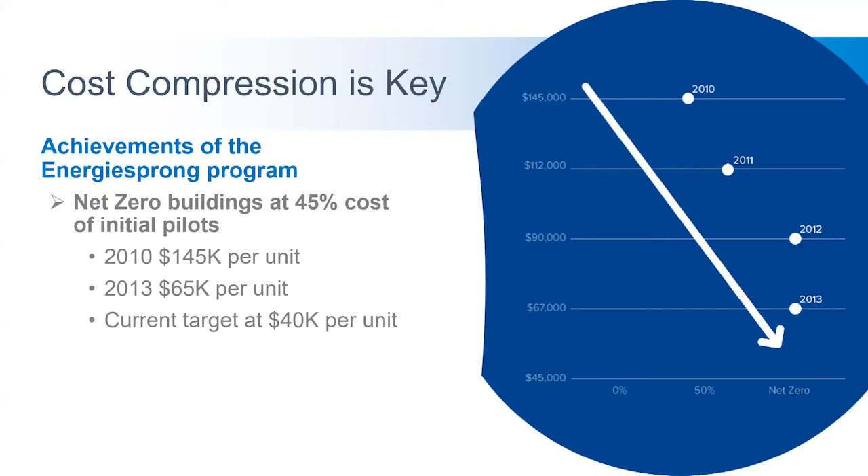So we know cost compression is key, and this is what's really attracting us to this industrialized approach, and really taking a lesson from what happened in the Netherlands during the Energiesprong program. In a handful of years, they were able to significantly decrease costs, moving from similar price points to what we're looking at right now today at about 150,000 per dwelling unit, to substantially lower costs, so something on the order of a 50% or greater reduction in costs using this industrialized approach.

So what have we done to date with the Retrofit New York program? I'm going to go into a little bit of detail about that. So in 2018, Retrofit New York really launched its first public-facing initiative through a design RFP that was launched in February of 2018. During the course of that process, 6 design-build teams were qualified and selected, and we ensued on a 6-month design process for those initial pilot projects. So by the end of 2018, we did have 6 designs that those teams produced.

In the middle of 2019, our first pilot actually entered construction, and earlier this year, we're kicking off a pilot effort with NYCHA, the New York City Housing Authority, to look at deep energy retrofits within their portfolio. I'll go into a little bit more detail on NYCHA and that pilot opportunity a little later. And we're also doing some work with demand aggregation with the buildings in our neck of the woods.

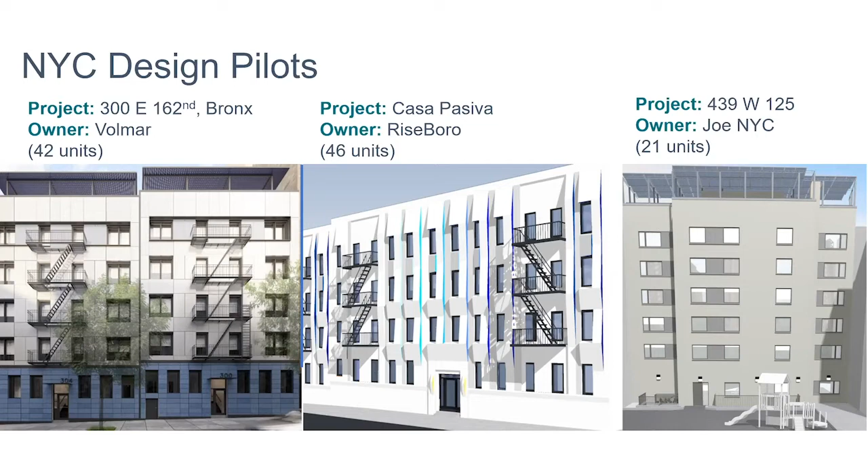So the pilots that we released in the first round are design pilots, so we don't anticipate that all of the pilots will actually make it to construction, but we are anticipating about half of those pilots to actually make it to construction. Right now we have the Riseboro Casa Pasiva project, which is in the middle of the slide. That project is currently in construction, and we're anticipating the Joe NYC project, which is on the right side of the slide, to close and enter construction around Q3 of this year.

Unfortunately, due to the COVID-19 impacts and the shutdowns, there's a lot of uncertainty around timing and the ability of various stakeholders to move forward, but we are hopeful. Similarly, we've done 3 design pilots outside of New York City to target low-rise typologies.

start to innovate. Some of the big challenges, to no one's surprise, cost is a huge driving factor here. Some of the technology just isn't quite ready for prime time. Specifically, we have some challenges around electrification of domestic hot water for larger buildings. The supply chain isn't really where it needs to be to really take on this Energiesprong style approach. And market segmentation is a challenge.

So data about the market, data about the buildings, that's very much an issue that we're still confronting and we're attempting to really remedy. So we've had some time to digest all of the learnings, and what we've done is really pivoted our approach away from this design-centric approach to more of a product development and implementation approach. So to put it bluntly, if you want to really pursue an Energiesprong style retrofit, you need Energiesprong style products in the market, and we just don't have that.

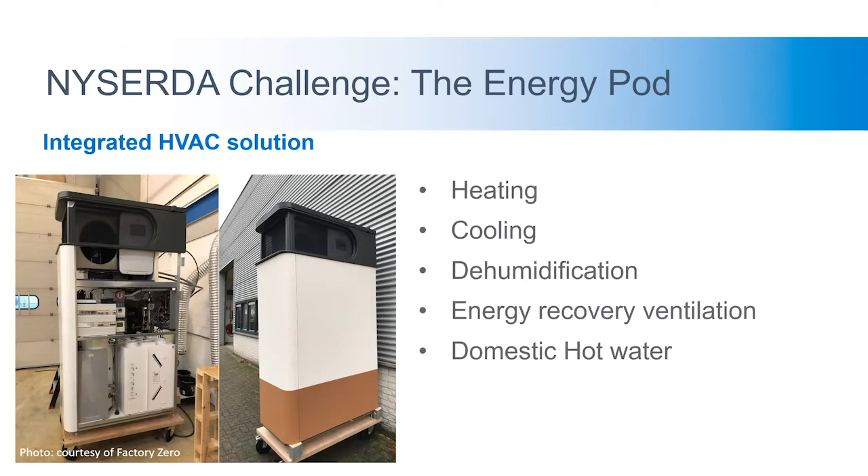The image that you see in the slide right now is an example of an energy pod that's available in the Netherlands through Factory Zero, and we're looking to bring something similar to our market. We did get quite a bit of interest in that round, and we got a handful of viable proposals actually put in, but unfortunately, again, due to the shutdown, that's causing all kinds of impacts on the ability of manufacturers to actually come through and develop what they actually proposed.

So there are some impacts that we're trying to mitigate, but ultimately we do expect to see some product come out of this effort in the next, I would say, 12 to 24 month time frame. So what are we looking to do in the near term going forward? So similarly, we're looking to put out some support for building envelope. So really get firms to come in to develop solutions specifically for the retrofit space for more comprehensive building products. So things like panelized building envelopes, specifically for retrofit application.

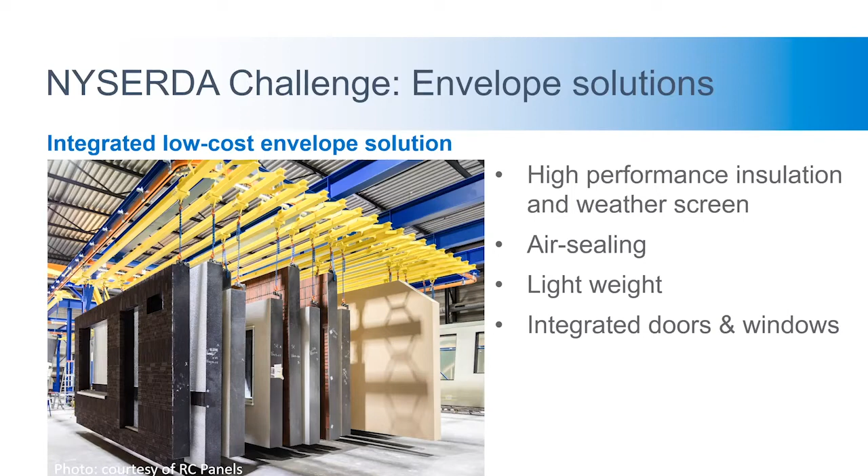Similarly, we want to put out some support to what we're calling solution providers. So what's a solution provider? That is an entity that will deliver the end-to-end solution to the building owner using more of a turnkey approach. So there's not anything quite like that in our market, and there's a fair bit of work to do there. But in essence, we're really looking to drive a new way of doing business through this solution provider model. And in essence, what we're looking to do is bring more innovative business models to the space, really pulling on all the levers, supply, demand, finance, regulation, to really look at how we can really drive this

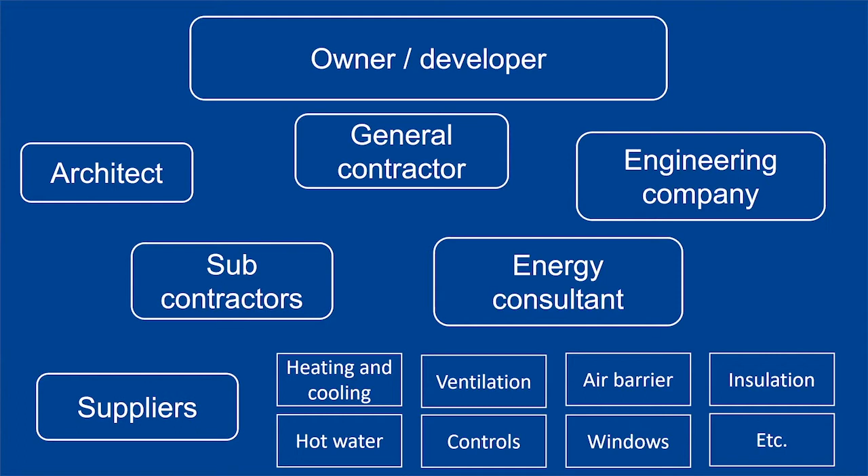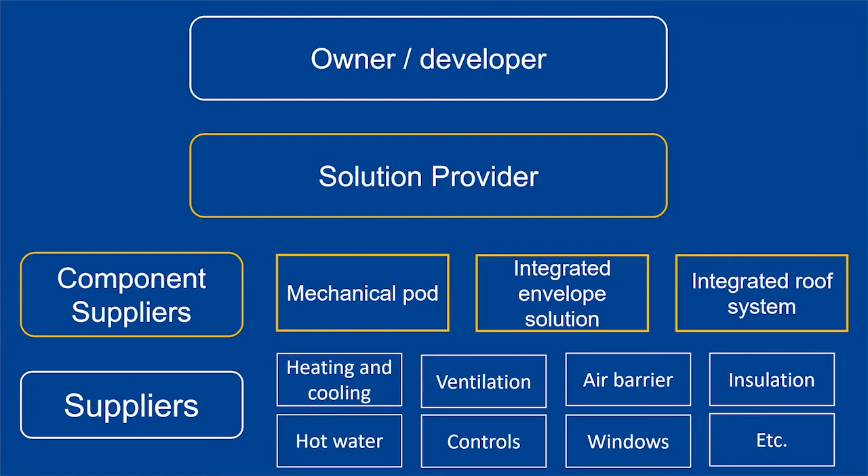approach in our market. So when you look at an existing construction project right now, you have an owner that needs work done on the building, and you have a bunch of actors trying to deliver that service in a less than optimal way. What we're proposing is to really flatten the market a little bit and provide all those services through that solution provider through use of more integrated components. So that needs a fair bit of work, and we're in process of making the business case to do just that. And what does that mean, making the business case? Well, there's quite a bit of work ahead of us. Part of what we have to do is really reduce barriers to entry in the market.

And when we talk about making the business case, there are pretty big ticket items that we need to address. So items such as quantifying the market opportunity, really providing risk mitigation mechanisms, and really making sure that capital is used more efficiently in that process. And again, really sizing the capital need to support our stakeholders on that initial ramp-up period. And of course, using those development of innovative business models to really drive cost compression.

Part of bringing more innovative business models to the market is really pulling the sector into the new millennia. And we think a big part of that is utilizing technology to implement digital processes. And when we say digital processes, we're talking about a digital process that's end-to-end. So all the way from the initial customer acquisition all the way through to manufacturing.

So we're looking at the way buildings are actually measured and scoped, and really the entire chain that's associated with that. So all the way from drawings and really transitioning that to manufacturers in a relatively seamless way. We think there's a lot of cost compression to be had in that model, and looking at that process from end to end. Similarly, we're looking to really provide better information to our manufacturing partners.

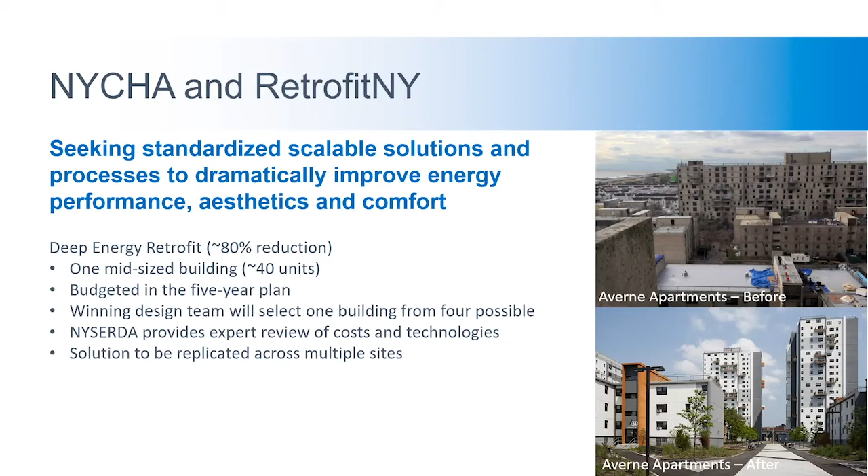So we're in process of reviewing the proposals. We've got about 10 proposals that came in. We're going to be selecting one team. That team will have an opportunity to pick from a handful of buildings for a future pilot opportunity. NYSERDA is going to be providing technical assistance, and the idea here is to really land on a solution that's scalable and that we can actually repeat in the NYCHA portfolio on additional or multiple pilot sites.

So just a couple of words about the time frame of that pilot. So I mentioned at the beginning of the year, in mid-January, NYCHA did release the RFP. NYSERDA in March released a request for qualifications to qualify the teams that would be eligible to actually submit to that RFP. We're anticipating making an award in Q3, possibly Q4 of this year, after which we'll enter into a 6-month design period in Q4 of this year and transition to the beginning of a 12-month construction period in about Q4 2021. So we have a lot of high hopes there.

And as I mentioned, a lot of people are paying attention to that space because when you think about NYCHA, you think about scale, and the Retrofit New York initiative is all about scale. So what else are we doing in the market? So one of the big things that we want to get across to our stakeholders is that we want to think in terms of products and not projects.

What does that mean? It means that we want to come up with approaches that are relatively scalable, or I should say very scalable, with minimal effort to very fixed use cases. So in essence, we're looking at the bespoke approach that we use today in terms of building retrofits, and a really industrialized model that's in use in the Energiesprong initiative right now.

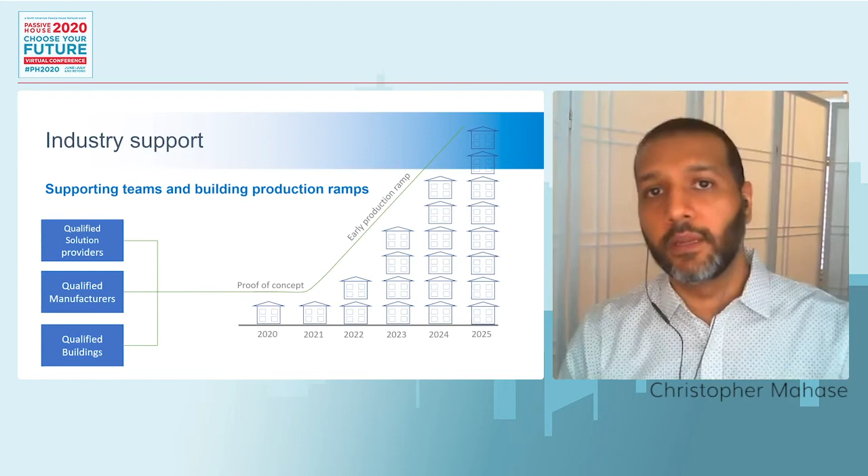So in the next couple of years, we're looking to do proof of concept pilots on a low volume basis. And once those kinks really get worked out, we're looking to start early production ramps to start getting some early scale in the various portfolios across the state. So demand aggregation, that's something we're doing in tandem with the efforts that we're looking to do on the industry side. So demand aggregation is really about elevating the voices of building owners and having them speak in unison to really get the industry to move on specific solutions.

So to that end, we're in the process of kicking off what we're calling the Retrofit New York Pledge. And this is basically a way to really have building owners come together and really leverage their voice en masse and really present this opportunity to manufacturers, to suppliers, to really get them to see that there is an opportunity here, and what the need is. Specifically, what the pledge does is really outline the criteria that the solutions need to hit. And if those solutions do hit the stated criteria, then you have a market here that's ready to invest, ready to actually jump on that solution.

So we're talking about the broad criteria that we're really targeting. Ease of application, that's a given. We're trying to really implement this industrialized approach. Ease of operating and maintenance, net zero or near net zero levels of performance. We're requiring no fossil fuels on site in the long term. In the short term, we know that there's a bit of a transition that needs to be made there. So we're a little bit flexible on that point. But the end state is a solution that's all electric. And of course, we need it to be cost effective. So we're in process of actually doing a lot of outreach to building owners right now and really getting them to sign on to this effort.

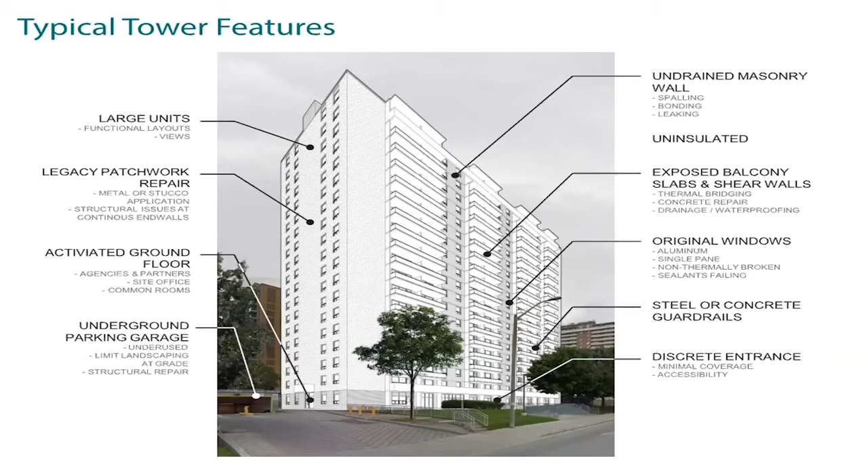We also, for a large part, have balconies on our buildings. So certainly having exposed balcony slabs, exposed slab edges throughout the building, and in some cases, vertical shear walls protruding through the envelope, creating some significant challenges from a thermal bridging standpoint, and some other structural issues that we need to contend with as we're looking to repair these buildings. From a glazing standpoint, we've oftentimes got original windows, aluminum framed for these high-rise applications, single pane glass, not thermally broken, sealants failing. So as Noah was mentioning previously, in the past the repairs have been specific to a complaint in a unit, and we didn't have the luxury of being able to do wide-scale replacements. And lastly, looking at guardrails for the balconies and discrete entrances, which in some cases are narrow and don't afford accessibility, which is definitely something that we're considering as part of these projects moving forward.

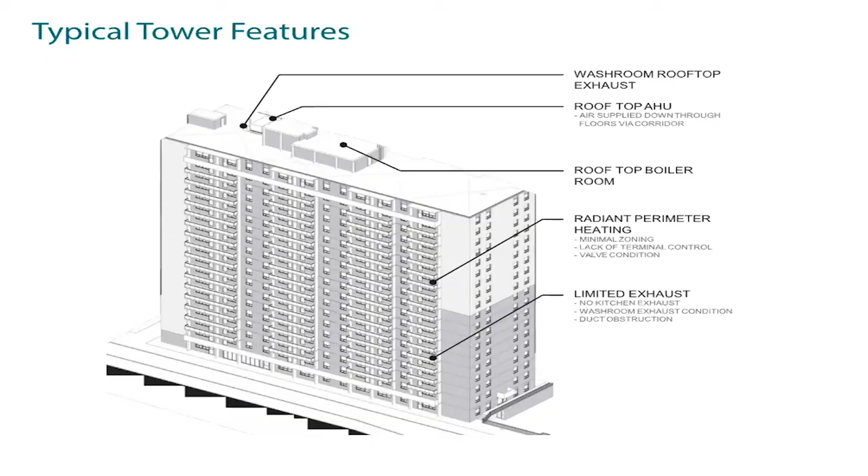So in addition to some of the inherent challenges that we've got with our building features, Noah had alluded to some of these. We also have some of the additional considerations for when undertaking massive work at these buildings. So we've got the occupied conditions, which creates, as Chris also had alluded to, additional considerations for phasing work and for making sure that the disruptions and downtime of services are minimized.

As Noah had mentioned, tenants typically do not pay utilities, so that financial incentive to monitor your consumption is not necessarily a driving factor for us, and we need to engage with tenants in other ways. Also, just something as simple as existing records to understand the systems that are original to the building. Many of these buildings had been downloaded historically through sequencing of restructuring, and so the documentation that we've got for some of our buildings is quite poor, and requires a lot of on-site investigation to sometimes understand the buildings truly.

Obviously, the poor facility condition for buildings that are 50 and 60 years old, if not older. The patchwork repair, also in some cases not properly documented. So just making sure that's considered with any future designs. Lack of cooling. So centrally, there is no cooling generally provided for our existing buildings, which then leads tenants to need to install their own means of cooling in their units. So generally a floor-mounted portable air conditioning unit, which then also needs to consider the aperture for integrating with any of the windows in the building.

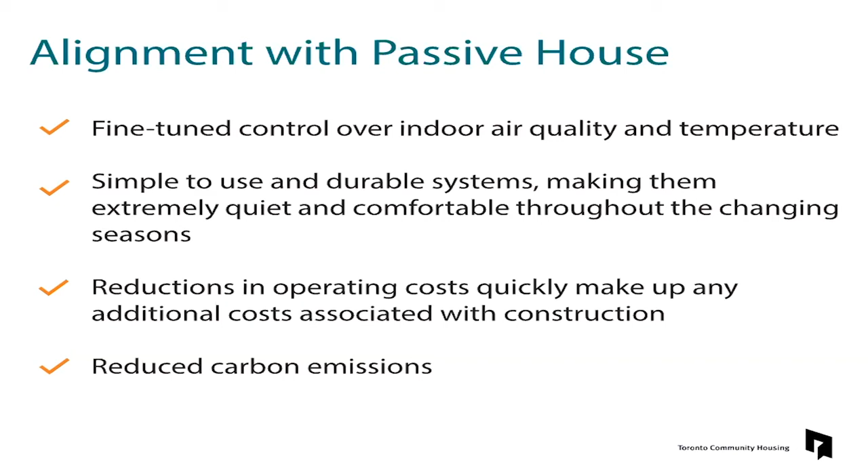Next, reductions in operating costs to be certainly offsetting any of the capital premiums. Once again, having that long-term perspective in mind as a property owner with utility bills of upwards of $150 million a year. Any improvements to that absolutely make a huge difference and allow us to reinvest those savings into our assets again. And obviously, with the reduced consumption, we're able to look at reductions in carbon emissions. So definitely a lot of alignments with Passive House, as well as what Retrofit New York is striving for.

So as Noah had mentioned, I'll just give you a quick overview of one of the first buildings that we were able to look at a solution that was more wholesome as opposed to a piecemeal approach. And as Noah had mentioned, there certainly was a lot of hesitation to proceed in this manner, but I think the results are pretty spectacular, and definitely this was an important building to start us off on this sort of holistic mindset.

Further to, as the funding had grown, we've been able to not only look at more measures at one building, but be able to actually scale up across more buildings. So up until recently, as Noah had mentioned, we've been able to focus on 9 to 12 buildings as part of a program, often incentivized by higher levels of government. And with the National Housing Strategy, we're able to look at 80 plus buildings, which represents about 15,000 residential units. So we're truly excited about the opportunity of this scale, and we'll be going into that in just a second.

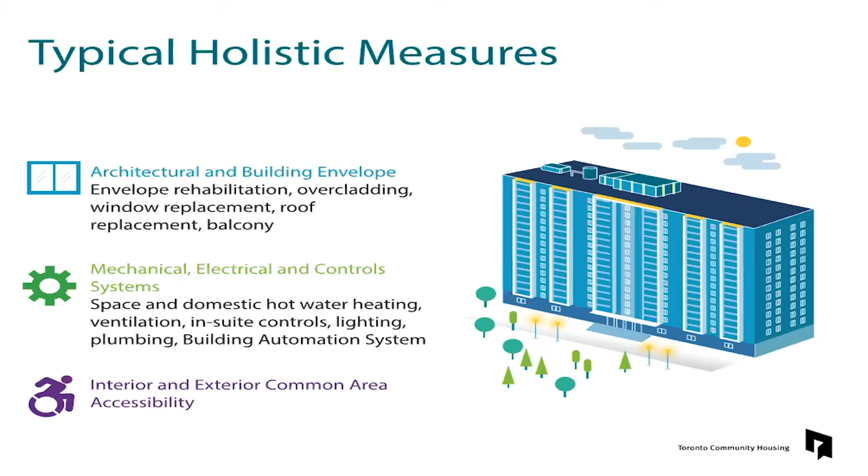So making sure that accountability is there, that visibility of how building systems are currently operating and whether they are operating at their optimum level. And then also just tying it back into the National Housing Strategy's accessibility goals while we're in there, using it as an opportunity also to upgrade interior and exterior common areas for accessibility.

So in terms of scalability and market transformation, I think this is quite an exciting opportunity for Toronto Community Housing and truthfully the market as a whole, with these 80 plus buildings that we've got a mandate for upgrading in the next 8 or so years. That represents 15,000 units that we're able to affect, as well as roughly about 100,000 windows. So it's definitely an opportunity that we've realized as an organization, and we're eager to see what kind of solutions are out there from the design community, and as Chris had mentioned, from manufacturers, and what kind of products can support us with meeting our objectives.

So the objectives that we've set out as we enter this work, and mind you, we're also quite early on in our journey, and recognize that we've got a lot to learn. But ideally, we're raising the quality and energy performance of capital retrofit work. We are creating a set of innovative design solutions to address issues specifically unique to social housing, and then also, being a public entity and wanting to scale this out as much as possible, lowering the price point of higher performing products by leveraging the purchase power of larger volumes. So I think a lot of this speaks to what Chris's group is looking to achieve in New York, and the hope is that these products can then be available in a broader market that we would certainly be excited to see and implement.

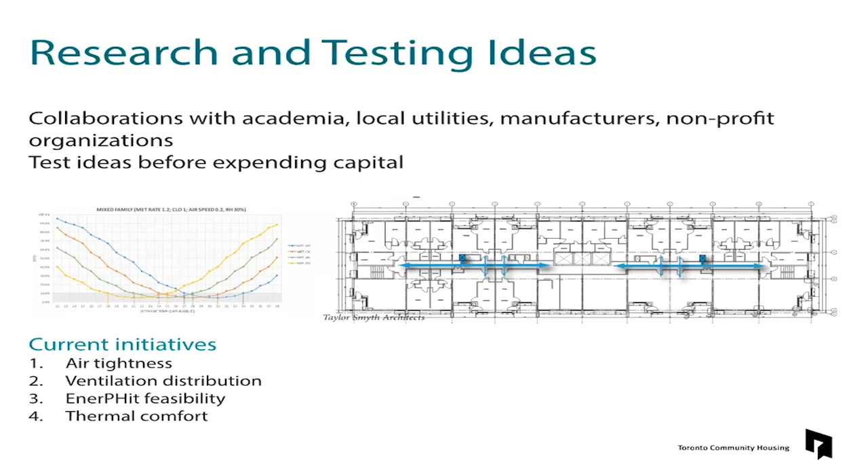large journey ahead. And then lastly, speaking to what Chris was also mentioning in terms of just collaborating, the more the merrier. There are certainly lessons learned from other organizations and entities that have undertaken these kind of projects, just to share that information and bring those various perspectives together, just to make sure that we arrive at a more informed solution moving forward. So obviously, we've been working with our tenants throughout these various projects.

Their input as to what works in their building, I think, is quite important, and certainly results in a smoother project delivery, just to make sure that they are engaged and informed about the work taking place. And then also, I would say more importantly, is ensuring that we're seeing that performance and the savings realized through the operations phase. So I don't think any of this is possible without sort of bringing the tenants into the

mix. From an internal stakeholder perspective, understanding that there are different entities that affect our ability to procure, and working closely with our strategic procurement team, and then also our site staff that end up sort of being responsible for the day-to-day operations and upkeep of the building. It's critical to get their input.

And then also, I guess more and more importantly as well, is the industry, and just sort of seeing what kind of solutions are out there, as Chris was mentioning, understanding not only the projects that have been a success, but also looking at the products that could be applied in an occupied retrofit condition.